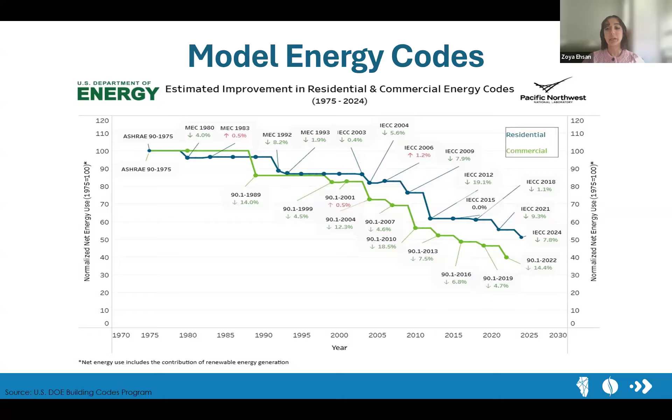But the last few cycles have seen more efficiency improvements in the model codes. The 2021 was about 10% more efficient than the 2018 edition, and the 2024 is about 8% more efficient than the 2021, which is exciting.

Now, what is a stretch code? A stretch code is a more efficient optional code that a jurisdiction can adopt when they're seeking an alternative compliance path that promotes a higher level of energy efficiency. The stretch code then allows jurisdictions or others, such as utilities or state construction agencies, to implement cutting-edge technologies and processes and demonstrate their feasibility and cost effectiveness.

Some jurisdictions use funding requirements and utility incentives to encourage participation in stretch codes, and this all can help gain market acceptance of more energy efficient codes in the future. In this sense, stretch codes may contain aspects that a jurisdiction is considering for their next baseline code adoption, creating a stretch to the next level.

Right now, Illinois is the only state in the Midwest that has a specific stretch code, the first of which, the 2023 stretch code, was made available for adoption at the end of last year. Specifically, the Climate and Equitable Jobs Act, or CEJA, directs that the Illinois stretch codes meet certain site energy indexes, and in order to make sure those targets are met, the index only takes into account energy conservation measures rather than, for example, on-site or off-site energy production. The residential 2023 stretch code is based on the 2021 IECC with strengthening amendments, and the commercial stretch code is based on the 2024 IECC with some strengthening amendments to ensure that CEJA site energy indices are met.

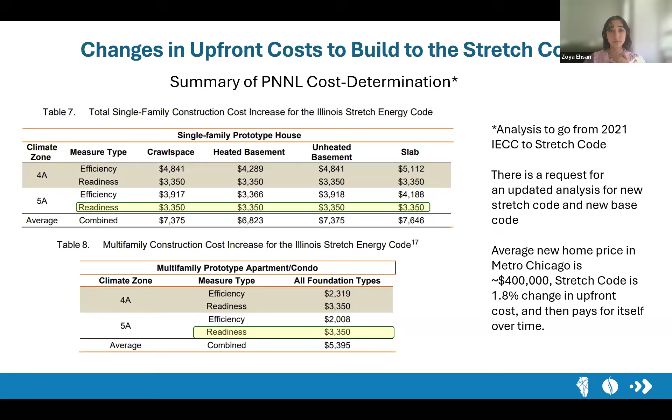How we determine if the stretch code is cost effective is by evaluating the life cycle cost, which is the present value of costs and savings over 30 years. This includes initial equipment and construction costs, energy savings, maintenance and replacement, and residual value.

When the life cycle cost of the updated code is positive, it is considered cost effective. As you can see, the life cycle total cost savings is about $8,829. So a positive LCC means the stretch code is cost effective, and the LCC considers both the upfront costs and avoided retrofit costs of readiness measures.

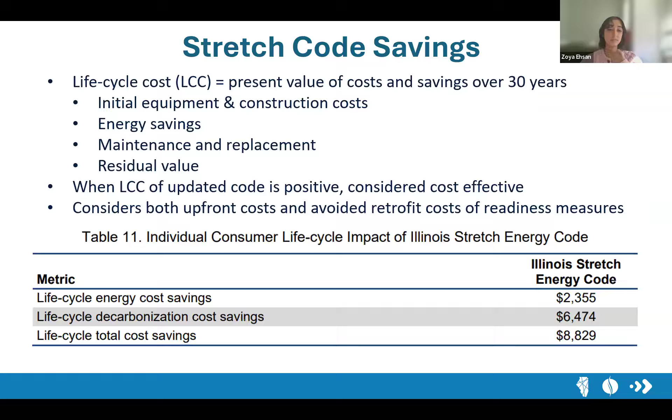Go ahead and pass it on to John to walk us through the actual requirements of the stretch code. Awesome, thanks Zoya. And thank you Katie for the introduction at the top.

My name is John Gossman, Technical Manager at the Midwest Energy Efficiency Alliance, and we will be getting into the technical aspects of the stretch code. So this table here shows the runway for the current edition of the stretch code and the successive versions. We are on the 2023 stretch code right now. It was implemented the first of this year.

As Zoya mentioned, these are based on site energy index targets. So what that means is a house built on the 2023 residential stretch code is going to be about 50% more efficient than the 2006 IECC.

One of the nice things about the stretch code is being able to see these incremental jumps from one version to the next, whereas on the base code, it's a little more uncertain how much more energy efficient each successive edition is. So the stretch code is advantageous in that it paints a clearer picture of where the energy efficiency metrics are going.

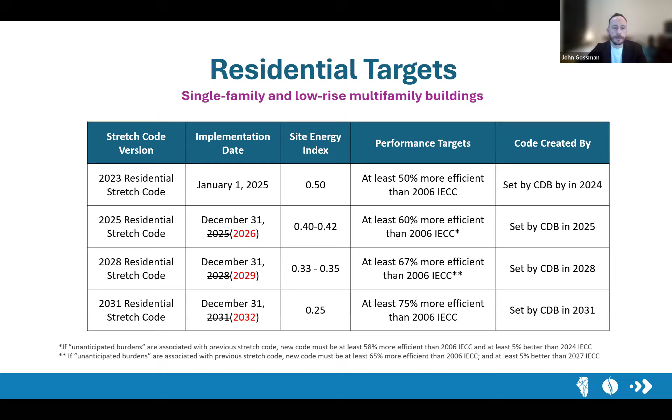So part of the stretch code is these mandatory aspects. There are some readiness provisions in the stretch code: electric readiness, EV readiness or having an EV charger fully installed, solar readiness, and then demand response capable thermostats and water heaters.

Going through these in more detail: the electric readiness just requires that conduit and wiring have a dedicated branch circuit for each of these appliances, terminating within 6 feet of them. So whenever a homeowner or resident wants to change one appliance for another, they have the option of going electric or combustion equipment without having to do major retrofitting.

Having the EV readiness in here is almost redundant, since Illinois already has a requirement for single family homes to have EV readiness or an EV charger installed. But as it stands, there is an EV readiness requirement here. Same with solar readiness—they're requiring buildings to have a roof that can support a solar system, again with a dedicated branch circuit for wiring and space in the panel, and then having demand response electric water heaters and thermostats.

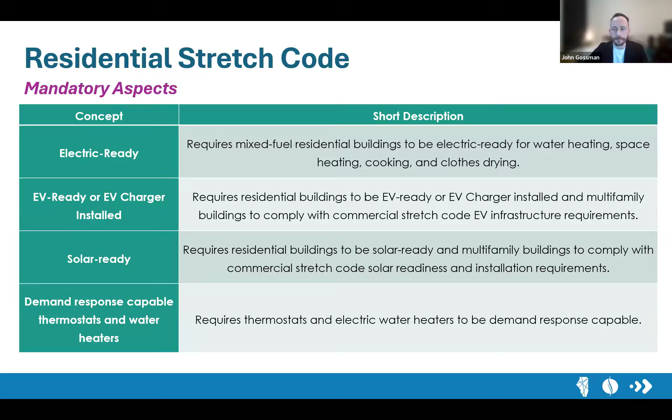The compliance pathways are very similar to the base code, except there is a passive house compliance pathway allowed with the stretch code and a net zero pathway. So those are what we consider the alternative compliance pathways. And then you have the more common pathways with the prescriptive, performance, and ERI compliance pathway. We'll get into each of these in more detail.

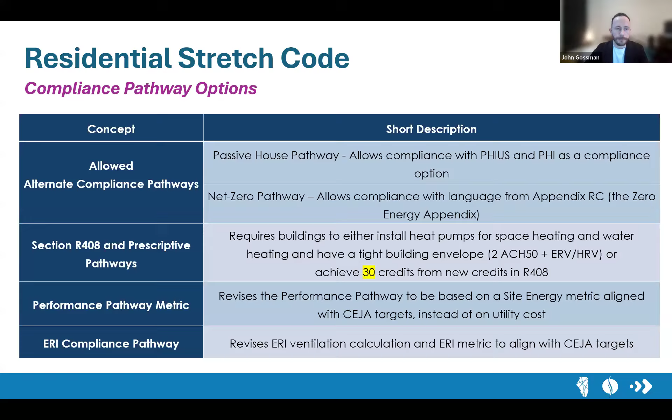As I mentioned, you hit these four readiness measures, and then you choose your compliance path. So once you have these mandatory measures in place, you choose your compliance pathway.

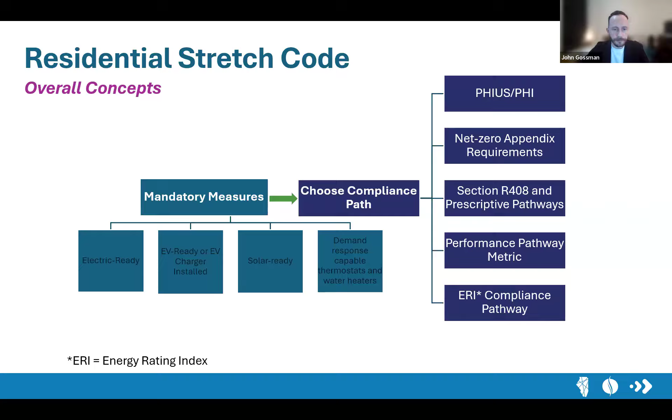The prescriptive pathway has different options. You can do the tight building envelope and heat pump package, which is 2 ACH50, a really tight building, with ventilation via ERV or HRV, and heat pumps for space heating and water heating. If you do all that, you've met the requirements of the prescriptive pathway. If you'd rather have more flexibility, you can choose from the R408 table, which has a list of efficiency measures with points attributed to them, and you meet the 30 credit requirement by picking from that table.

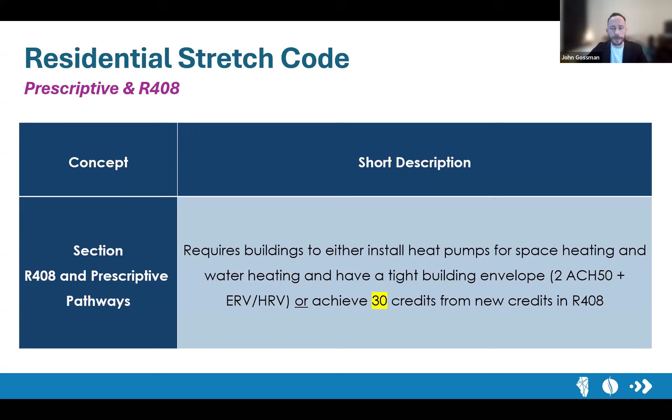This is the first option I talked about, the heat pump equipment and air tightness option. It must meet three requirements: the heating and cooling equipment will be an electric heat pump with certain capabilities, the water heater will be a heat pump water heater, and you need the tight building envelope at 2 ACH50 with ventilation.

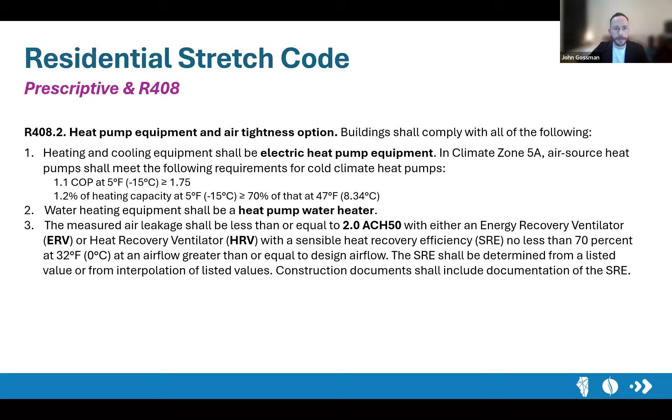Here is the R408 table I mentioned. You have to choose measures to at least equal 30 credits. I've highlighted some major ones here. If you put in a high performance heat pump system, at least in climate zone 5, you get 31 credits. So doing that meets the requirements for the stretch code.

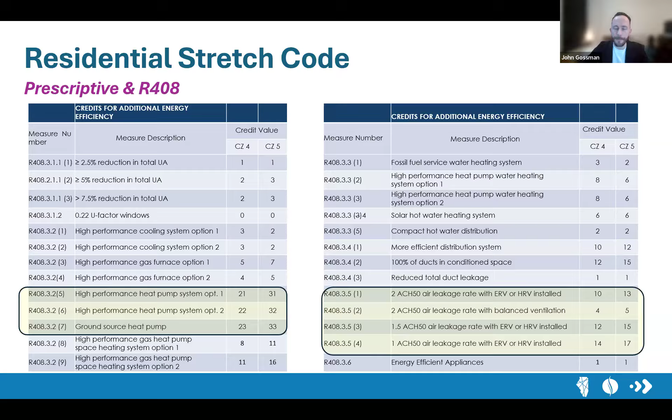Alternatively, you can pick some of these lesser credited measures, and as long as you get to that 30 baseline, you will have met the requirements of the prescriptive pathway.

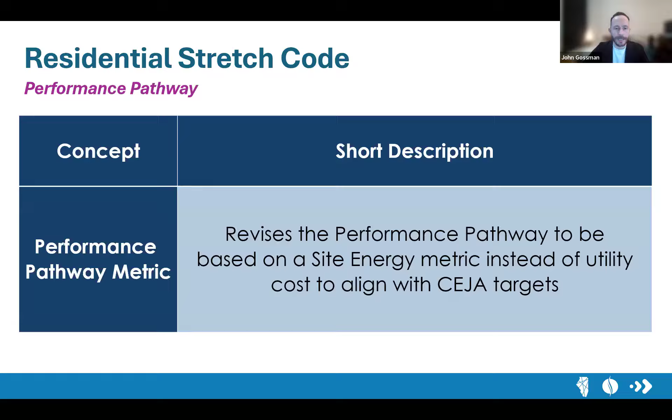The performance pathway revises the performance pathway from the base code, which measures this in utility cost. The stretch code actually has the metric of site energy instead of utility cost.

In this performance-based compliance, you have to meet three different criteria. You have to meet the requirements of table R405.2, which details HVAC sizing, air leakage, duct insulation, etc. Then, the proposed building thermal envelope UA—which is just a building's overall heat loss through its envelope—shall be less than or equal to the building thermal envelope UA using the prescriptive U factor.

Basically, using this equation, you have to be at least 90% as efficient in your building envelope as the prescriptive method. So in this performance path, you can actually have a less efficient envelope, but you make up for that with other measures. The third component to complete this performance pathway is that the proposed design shall be less than or equal to 71% of the site energy use of the standard reference design. So the modeled site energy use must be 29% more efficient than the reference design.

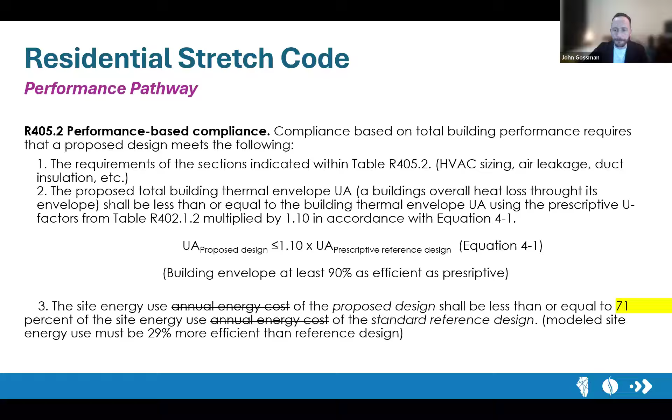The ERI compliance pathway has again been revised to meet the CEJA targets.

There is a bit of incentive for heat pump installation. There are different ERI scores, or HERS scores, required depending on whether you have combustion equipment or not. You'll see a 50 or 51 HERS score for those with combustion equipment, or 54 or 55 depending on your climate zone for those with heat pumps installed. So there's a bit of incentive to have heat pump installations with the stretch code.

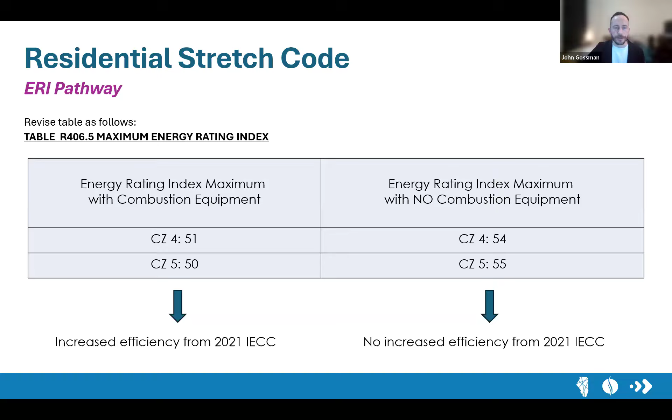These are the alternative compliance pathways I talked about at the beginning: Passive House Institute, and the Zero Energy Appendix.

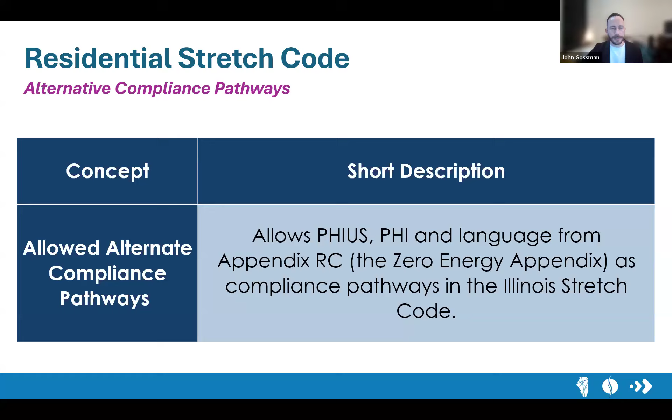The PHI or PHIUS, the Passive House Institute, is a new compliance pathway with the stretch code. So if you meet the requirements of Passive House, you are in compliance with the stretch code. You can check out those sites for more information about what Passive House is.

For net zero energy, this is similar to the HERS score. You get a HERS score of 47, and then you offset that with the required amount of on-site renewable energy, ultimately going to a 0 ERI, meaning that you are now net zero.

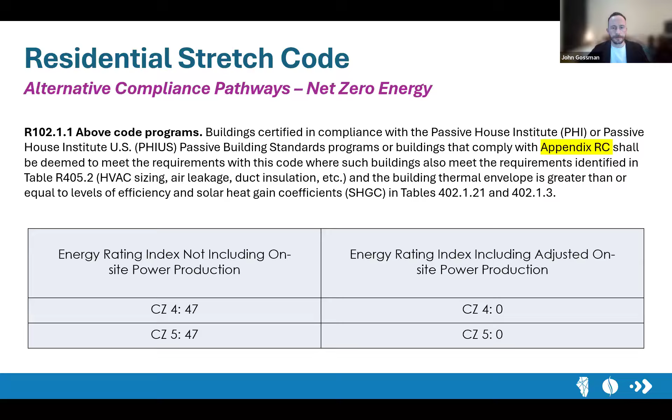So that was a really fast crash course on the residential stretch code. The commercial stretch code is similar in design. As Zoya mentioned, the residential is based on the 2021 IECC. The commercial is based on the 2024 IECC, so there are a lot of similarities with the upcoming Illinois statewide base code.

It's based on site energy index metrics and the same kind of timeline for the stretch code to come out. The next version of the stretch code is in its final phases. There will be a public comment period, I'd imagine in the next month or so, where different stakeholders can provide input. The anticipated implementation date is fall of next year, though that's subject to change — that's what the current runway looks like for the next version of the stretch code.

Similar in design, site energy index increasing over time, with a planned and predictable increase in site and efficiency measure upgrades per new stretch code.

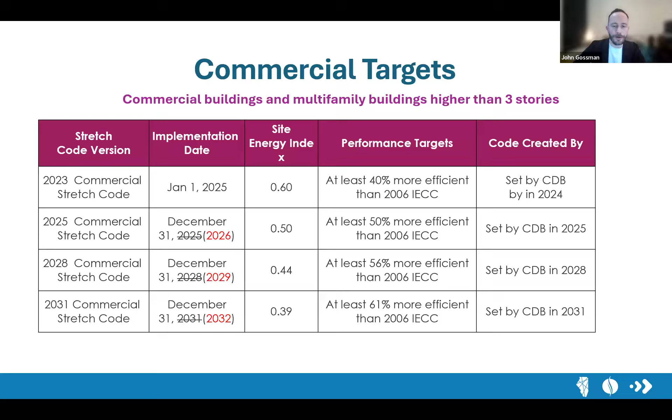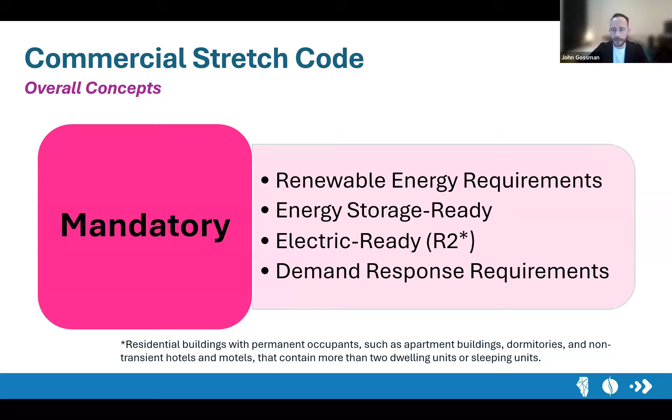Again, there are mandatory measures for each commercial building constructed. They have renewable energy requirements, energy storage readiness requirements, electric readiness for R2 buildings, and demand response requirements.

For the mandatory on-site measures, let me back up — these concepts are taken directly from the 2024 IECC. As Zoya mentioned, the statewide base code is going to the 2024 IECC on December 1st, so we have two more weeks of the 2021 IECC. These readiness measures are going to happen no matter what, but they're also in the stretch code, so they're included in this presentation.

There is a renewable energy requirement: on-site renewable energy must meet 10 to 12% of the building's energy use. When you're unable to have renewable energy on-site, you're able to procure renewable energy off-site.

For energy storage readiness, that's all the same. There is some clarifying language in the stretch code to correct code references and improve safety and energy storage requirements — so it's the same requirement, but with clarifying language for safety.

There is electric vehicle readiness, depending on the building use type. And with demand response: smart thermostats, demand responsive water heaters, and renewable and grid integration credit requirements — another set of tables where you have to hit a certain amount of credits in the renewable and grid integration section, which we'll talk about in a second.

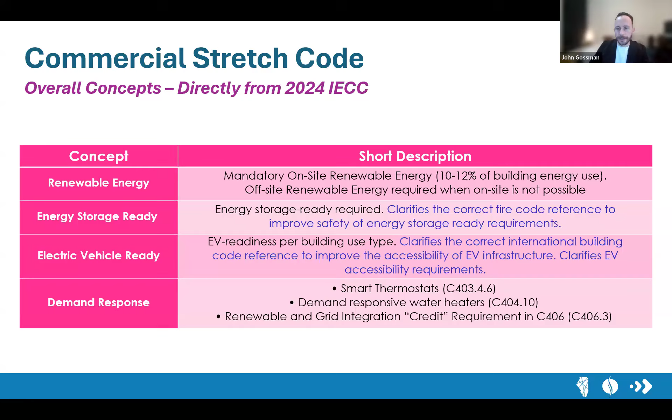There is an energy monitoring component for new buildings in the stretch code. Any building greater than 10,000 square feet must have mandatory monitoring done, with some exceptions such as dwelling units and R2 occupancies. It also requires new buildings to separate EV energy use from the rest of the building energy use.

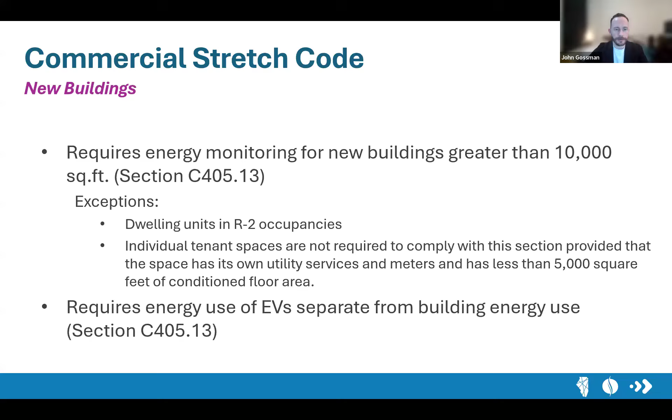Those previous measures were directly taken from the 2024 IECC and will be coming in two weeks regardless of whether you adopt the stretch code or not. These next measures go above the 2024 IECC.

Electric readiness requires new R2 occupancy commercial buildings to include electric infrastructure for electric appliances. It requires horticultural lighting to comply with current lighting requirements for cannabis facilities, and additional energy credits for buildings that do not use heat pumps for main space heating and cooling. This is not an electrification ordinance by any means — it's just electric readiness to help building owners and homeowners down the line avoid expensive retrofit costs.

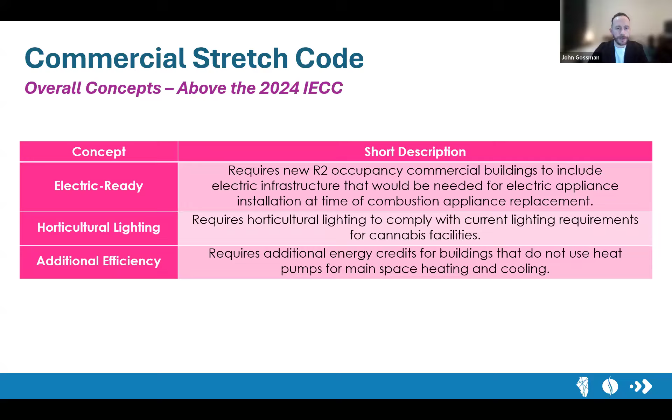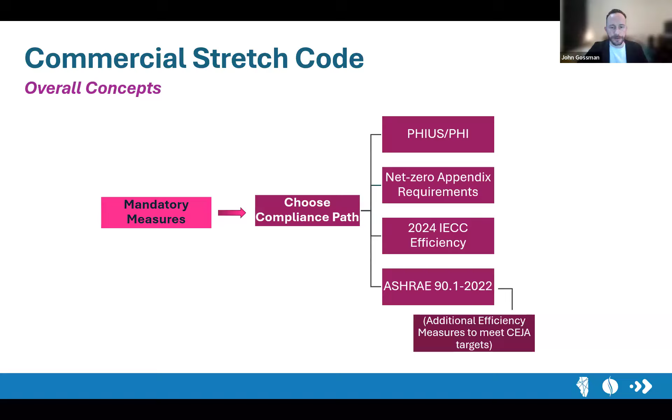Again, mandatory measures, you meet all those, and then you choose a compliance path, much like the residential. So you have these alternative compliance pathways with the PHIUS and the net zero appendix. And then you have the more common 2024 IECC, which has a prescriptive method and a simulated building performance pathway. And then the ASHRAE 90.1 2022, which just requires some additional efficiency measures to meet the targets.

So I think we can actually just go ahead and go to the next slide, we kind of went over all that already. So if you're choosing the ASHRAE 90.1 2022, it does include the language that you have to have these readiness requirements in there as well, like EV ready and electric readiness.

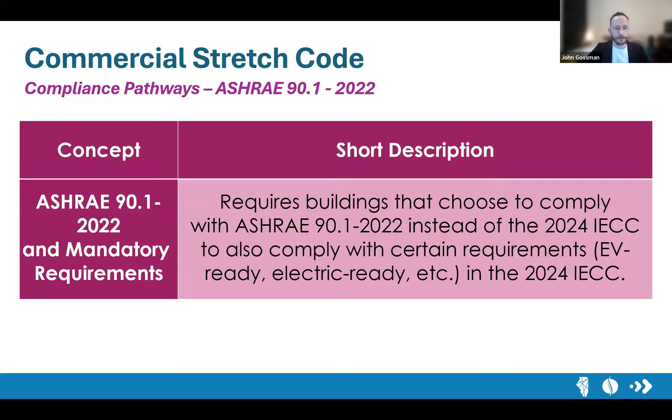The prescriptive pathway compliance is just being in compliance with sections C402 through C406, which is literally just the recipe on how to make a building. It tells you how much insulation in the walls, U factors, fenestration U factors, and all that. And then section C408 is also a table with efficiency measures with credits that you have to hit, a certain credit threshold depending on your building type.

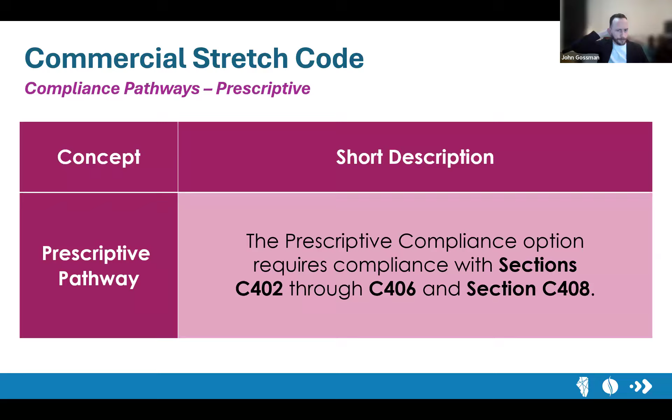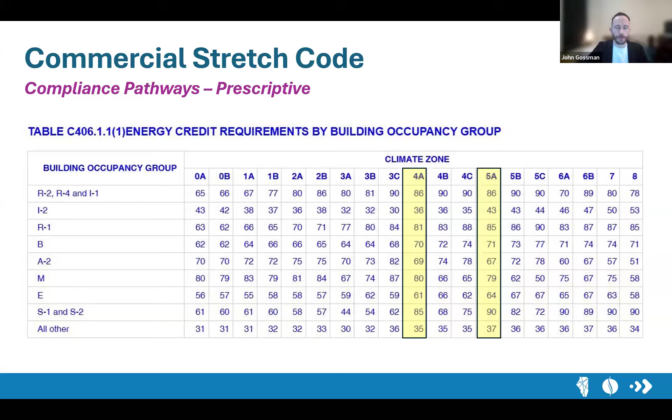I think I have an example of some tables in here as well. So these are the energy credit requirements by building occupancy group. I've highlighted 4A and 5A, which are the climate zones that Illinois is in. Depending on your building occupancy is how much credit requirements your building will require.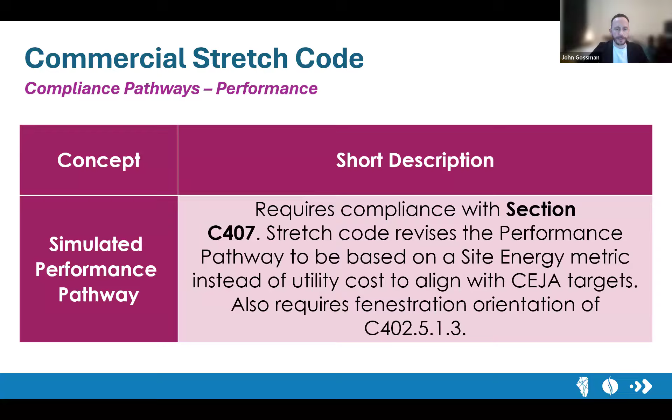The simulated performance pathway requires compliance with section C407, which lays that out in more detail. The stretch code revises this pathway again to be a site energy metric instead of utility cost, similar to the residential.

The effects on existing buildings: there is a requirement for substantial improvements to be electric ready and meet energy efficiency thresholds. The substantial improvement definition is defined as any repair, reconstruction, rehabilitation, or other upgrade to a building where the cost equals or exceeds 50% of the structure's market value before the improvement began. The additional efficiency credits for existing buildings require additions and changes of occupancy to earn additional credits if heat pump equipment is not installed.

This change of occupancy isn't like if a person moves out of a unit and then into a unit, you've got to change it. It's more if the building use type has been changed, then there may be additional requirements to meet.

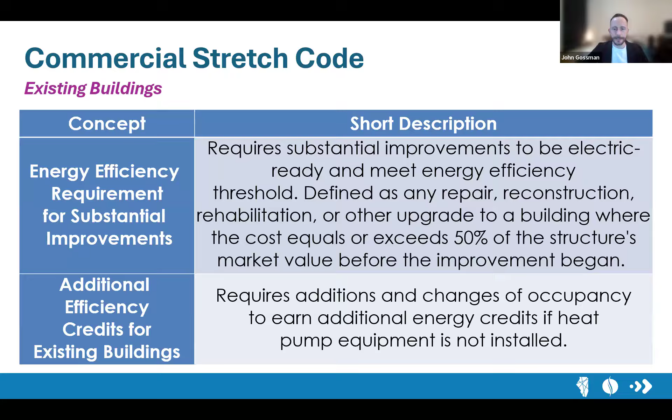So I think that is the last slide. We can go to questions.